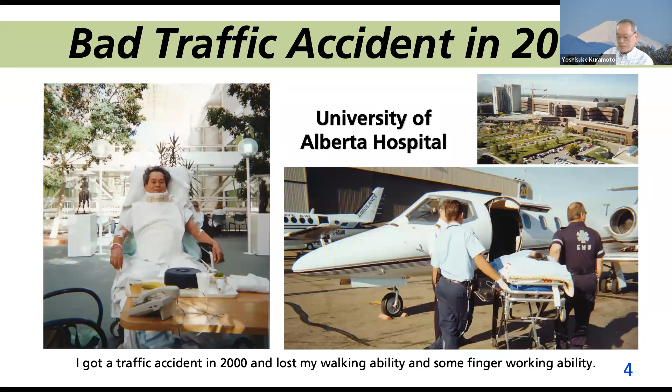In 2000, I got a serious traffic accident in Canada and lost my walking and some other abilities. In 2009, I came across a mobility scooter in Hawaii by chance. It was so good that I decided to buy one after I got back to Japan. However, mobility scooters were too expensive at that time in Japan and not offering the features I needed. But I got one using online auction made in Taiwan. That was what I wanted. But it was so heavy that I had to make a crane in order to self-load and unload with my Volvo wagon.

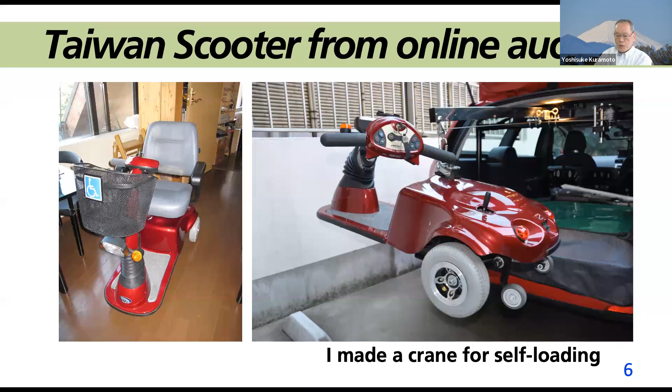In December 2013, I encountered a book titled FabLife, written by Hiro Tanaka, the father of FabLab in Japan. My longtime friend Izumi Aizu introduced that book to me. After I read it, I decided to dedicate the rest of my life to Fab. When I saw this photo of Fab City car at Fab 10 in Barcelona, though I couldn't go to Barcelona and didn't see it directly, I became confident that I could make a scooter myself by using plywood. No need for molding.

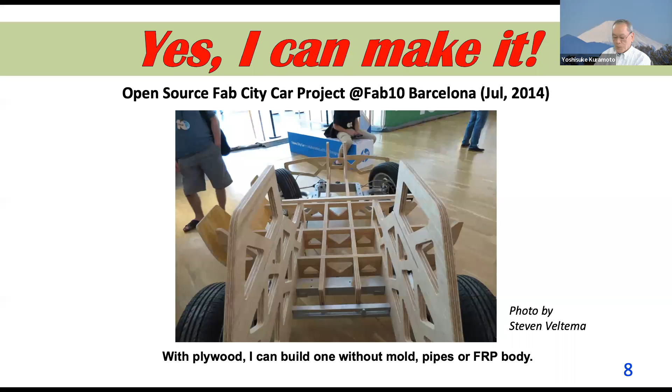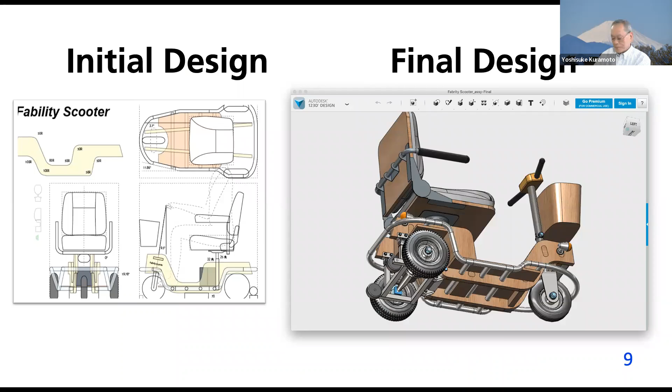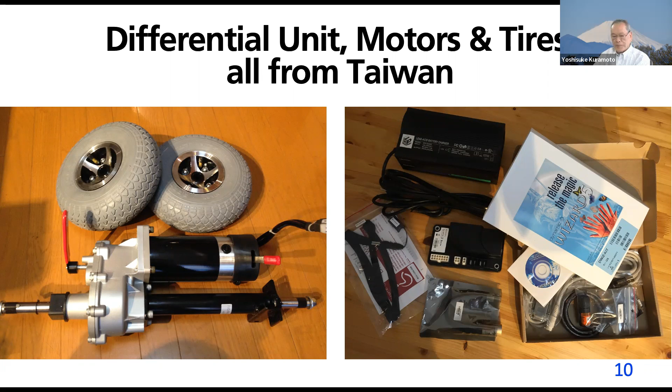After mastering the 3D software, I was able to finalize the scooter design. Those components were all sourced from Taiwan. Through Izumi's introduction, Mr. Ted Han of FabLab Taipei helped me identify Mr. Nick Su, who kindly shipped them all together to me. To save cost, I bought a second-hand scooter from online auction to obtain additional components such as seat and handle, etc.

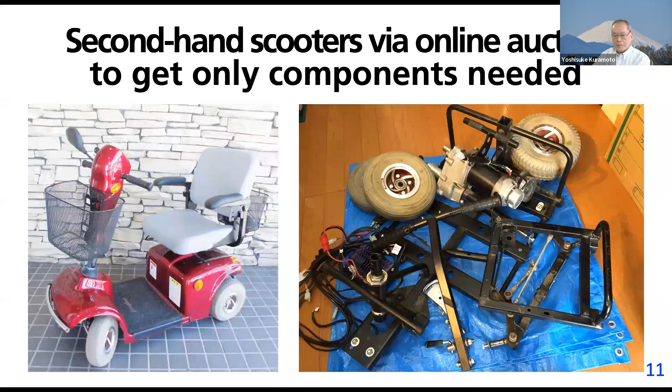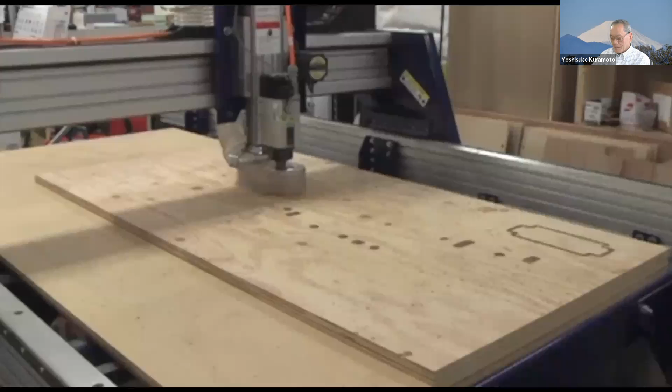I used plywood for construction material to make the body frame. To cut out the frames, I was able to use a ShopBot machine, thanks to Professor Tanaka at Super FabLab of Keio University. It took only 4 minutes to complete the whole cutting. Yes, very noisy.

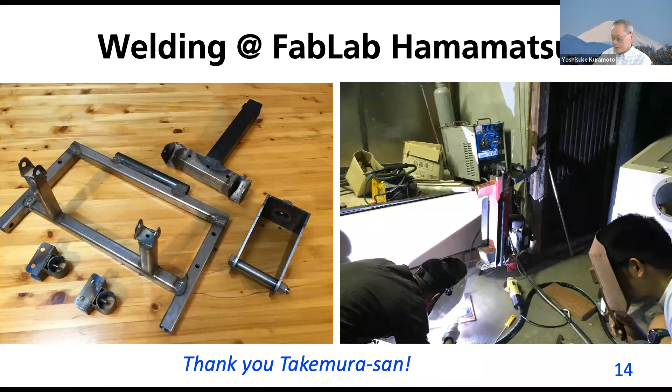I cut steel material manually myself to produce the rear axle mount and front forks. Welding was done at FabLab Hamamatsu, thanks to Mr. Takemura, my fab friend, who did the welding work there. All the parts were assembled at my small office. I used hacksaw and file the most, leaving my arms aching a lot.

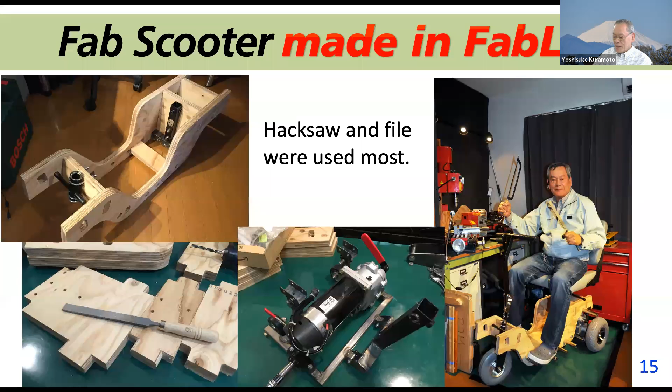In May 2015, just before I completed the first version, I went to Taipei to attend the second FabLab Asia Network Conference, Fan 2. I made a presentation of making my scooter and ended up meeting with the Prime Minister of Taiwan, Mr. Mao. A big surprise. Taiwan holds the majority share of the e-scooter market in the world.

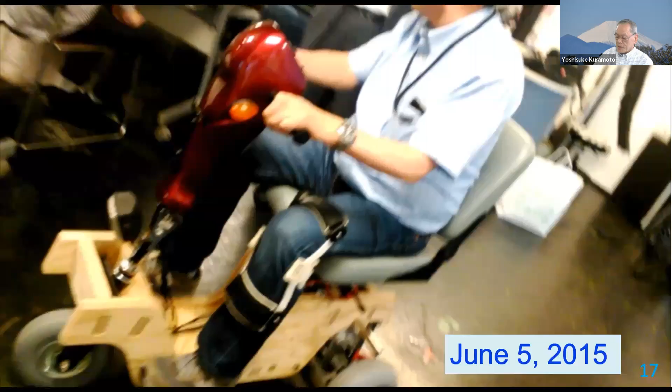Right after coming back from Taipei, I finalized the last steps and my Fab Scooter version 1 debuted on June 5th 2015 at FabLab Kannai in Yokohama. However, there are always bugs even after launch. After 2 days of test driving, I found 2 problems. First, the mounting handle was weak, so I replaced plywood with steel pipes. Second, I found the motor touching the body. I had to make the entire body again.

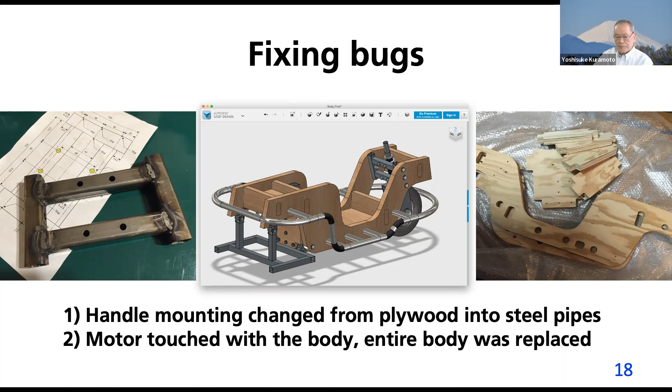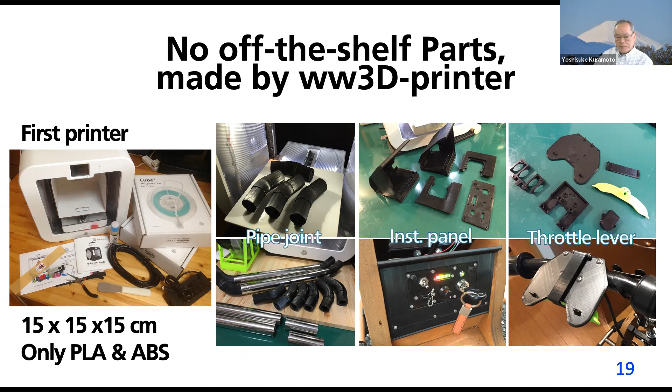Certain parts were not off the shelf at all: pipe joint, control box, throttle lever unit, and so on. No problem, I used a 3D printer to make them from zero. This is the first version of Fab Scooter, completed in October 2015. I took about 1 year from drawing to finish.

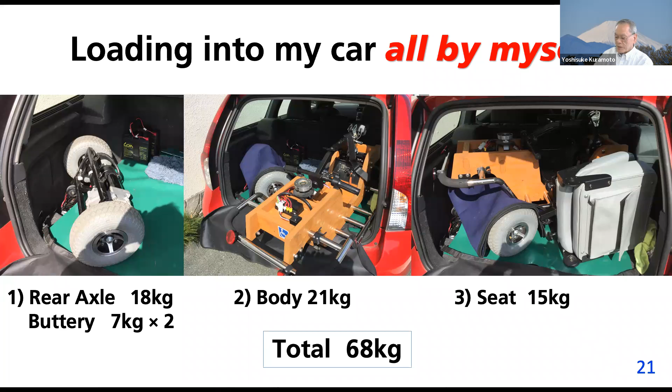Now I can load my scooter into my car all by myself. After unloading it, I have the freedom to move within a 5-kilometer radius, so long as the battery lasts. With my car and Fab Scooter, I can move to wherever I want. I am using my Fab Scooter almost every day. I strongly believe that mobility is a fundamental human right.

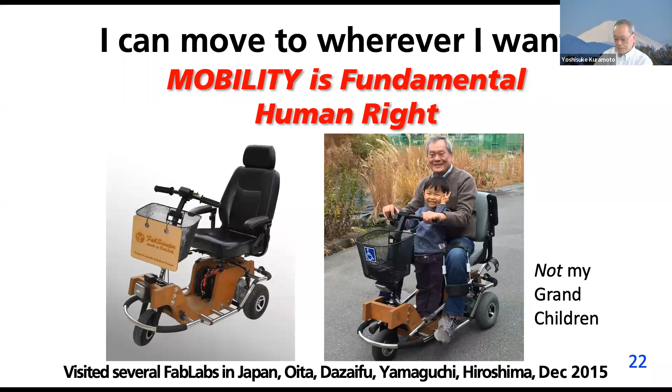In the first year alone, I traveled some 20,000 kilometers throughout Japan. Invited by Aizu-san, I visited the devastated areas hit by the 2011 Great East Japan earthquake and tsunami disasters and met the family members of the victims. It was 5 years after the disaster.

In August 2016, I tried to take an international flight with my Fab Scooter to participate in the 12th International FabLab Conference, Fab12 in Shenzhen, China. Do you know that electric wheelchairs must be accepted free of charge by all international airlines?

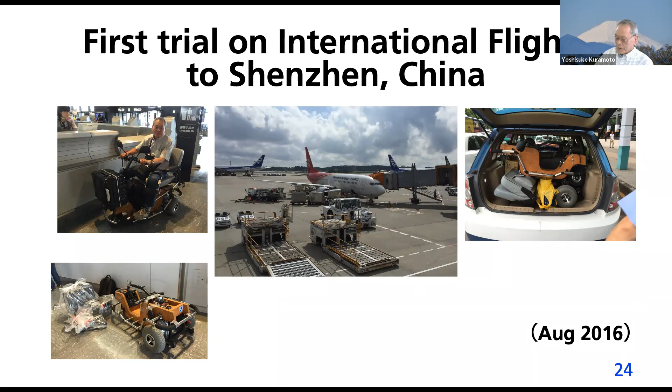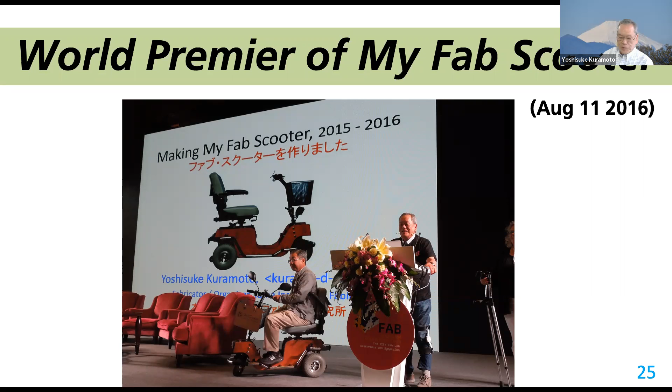In Shenzhen, I made my first English presentation in my life. After that, so many people came to congratulate and respect me. Unbelievable, I made it. Among them was Professor Neil Gershenfeld, the founding father of FabLab.

It seems many people like my story. I was selected as the finalist of the YouFab Global Creative Award in Tokyo in March 2017.

Three years after the Fab 12, I was invited to Maker Faire Dubai as one of the keynote speakers. It turned out that one lady who participated in my workshop in Shenzhen became the lead organizer of Maker Faire Dubai.

The keynote presentation in Dubai was such a dream experience, unforgettable. Thank you so much, Ms. Marwa Sarawi.

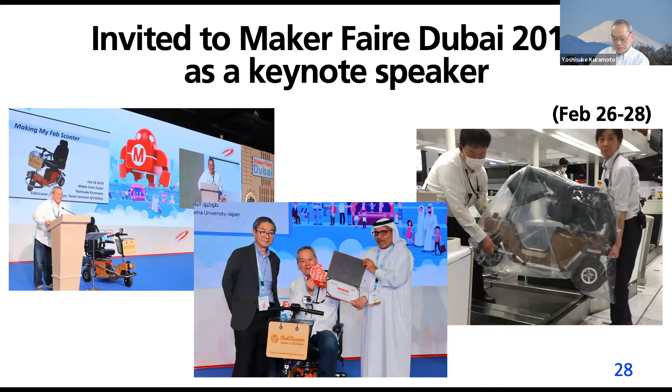But here comes the reality. The story doesn't end with the completion. After the launch, up to today, I have faced various troubles. I must take care of the maintenance work myself. Nobody else can do it.

For example, one day the electromagnetic cable was cut, so I did an emergency repair in my hotel room. The motor got weaker. After changing the motor controller and adding a heatsink, I found the battery cable connector contact was the real cause of the problem.

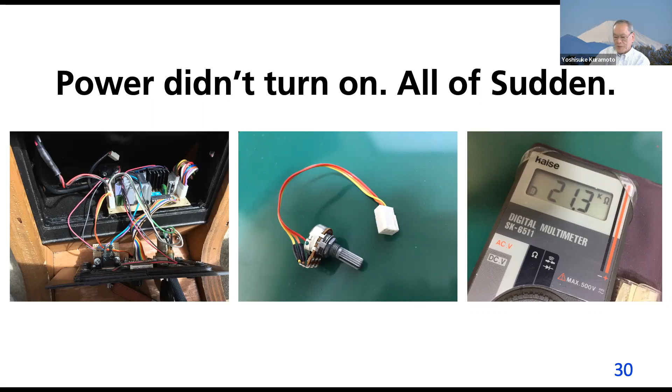One day, the power didn't turn on at all. The variable resistor went down. Of course, flat tires too. Many more troubles have happened since my scooter is my leg.

Any trouble should be fixed very quickly by myself. Otherwise I get stuck. I have a feeling electrical problems will occur again sometime soon. Trouble on the way out is the scariest thing. Be prepared always.

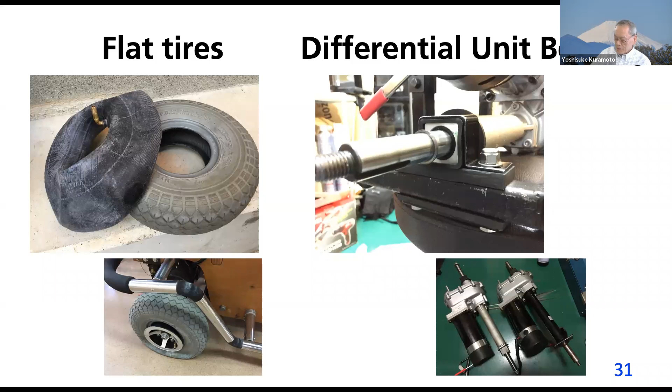Yes, the trouble did occur. Just five days after I finalized this draft, my Fab Scooter suddenly stopped working. The status lamp blinked five times, meaning a park brake fault. Looking at the manual, I found the park brake cable was cut, and I replaced the connector to fix it. Again, be prepared always.

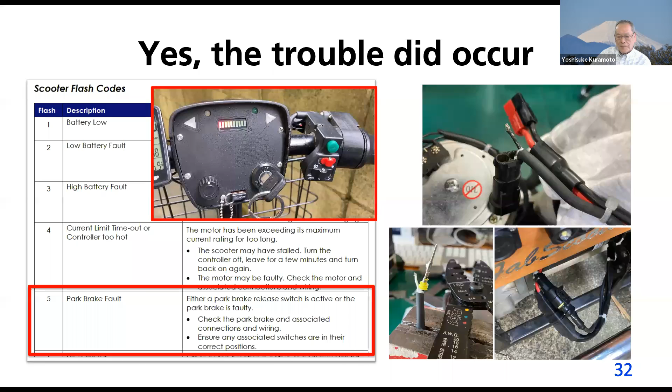Since I made this machine all by myself, I can take on any challenges I want. For example, I tried to print the tires using 3D printers. Well, the tire didn't work that well so far.

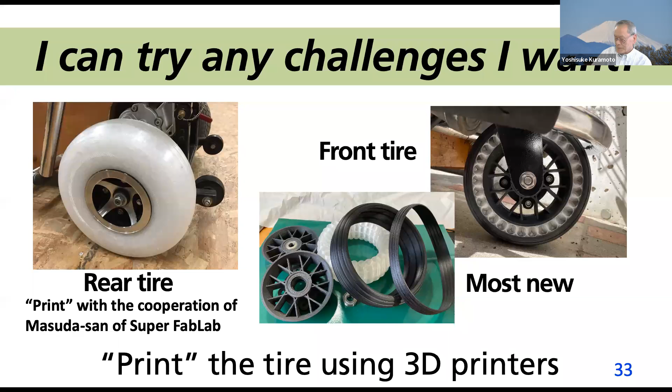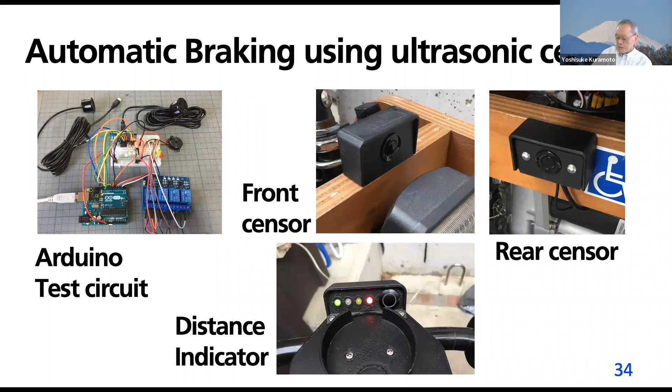Self-driving is the name of the game today, so I started making an automatic braking system using ultrasonic sensors. The speed is reduced to one-third if it detects an object one meter ahead, and it will stop at 50 centimeters distance. Very interesting.

Waterproof and protective coating for plywood usually lasts five years. It can be extended another five years if I repaint, but that means I lose my foot during the painting period. I decided to build a new body to minimize the idling time.

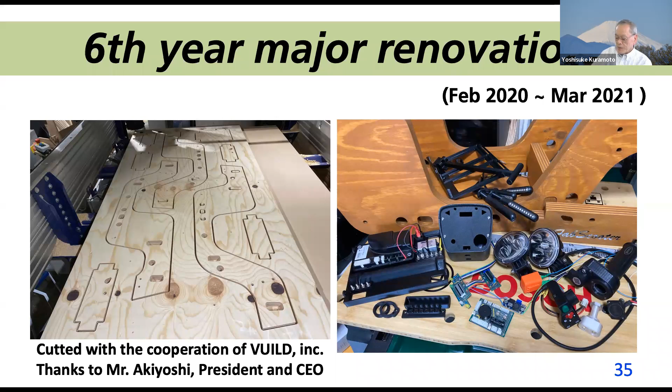All parts made by 3D printer, lighting, and wiring will also be renewed. The 3D printer I used six years ago had a small modeling volume capacity of only 15 cubic centimeters, and the filament was only PLA or ABS.

This time, I had a 3D printer with a larger modeling volume. I modified it so that all kinds of filaments can be used: polycarbonate PC, carbon fiber PC, thermoplastic polyurethane TPU, thermoplastic elastomer TPE, and nylon, etc.

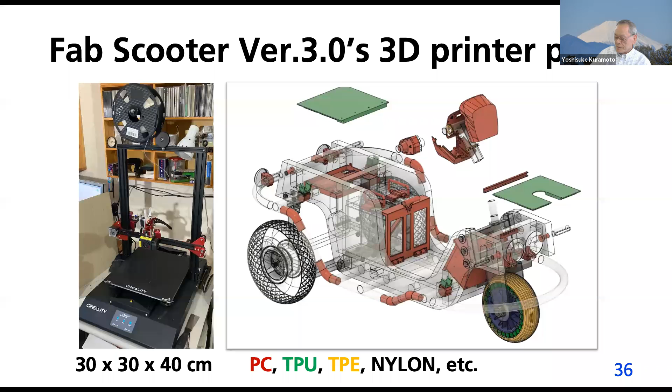Different materials were selected to fit different functions of the parts. Thus the weather resistance and durability have been greatly improved.

The number of parts made by 3D printer has increased significantly: throttle grip, gear mount, motor controller tray, instrument panel unit, dust cover, battery holder, etc.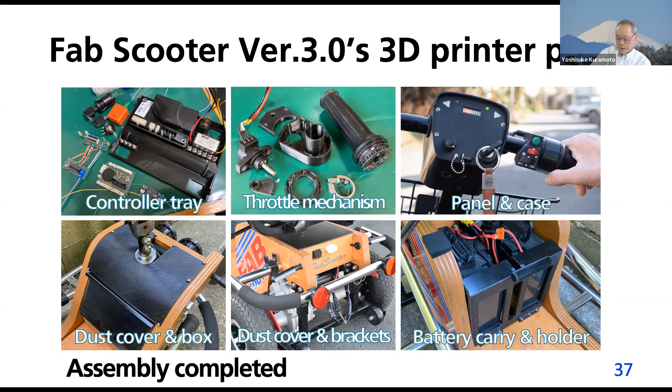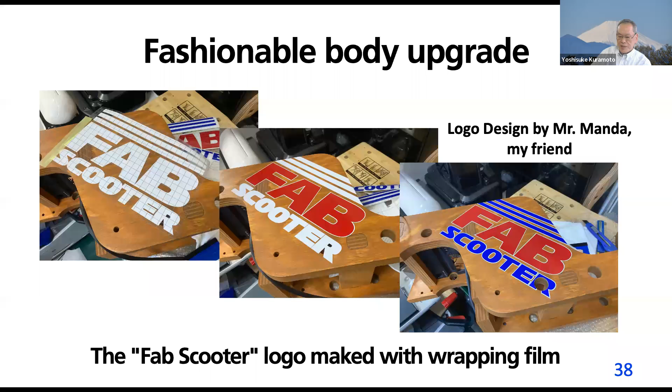The Fab Scooter version 2, I rode for 5 years. Now, reborn like a new car. Now it's version 3.

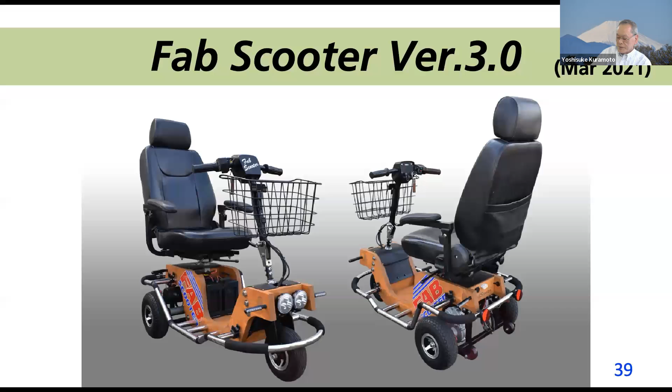Fab Scooter taught me the fun of making. Fab Scooter revived the joy of traveling. Fab Scooter has given me so many experiences I had never thought of before. Thanks to Fab Scooter, I have made many friends all over the world.

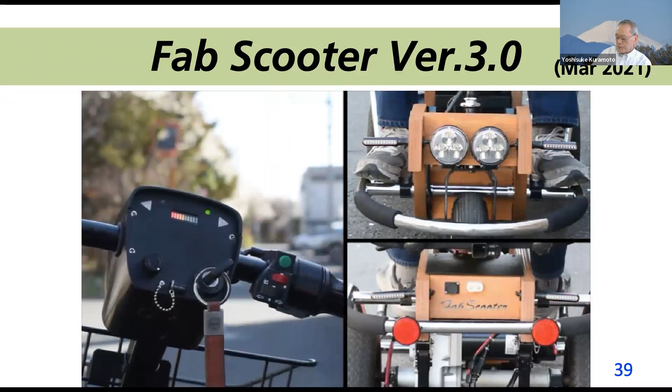In the coming 5 years or so, before I reach 80 years old, I would like to challenge version 4.

Finally, in Japan it is very difficult to diffuse such handmade vehicles due to huge legal barriers. Since 2017, I have personally supported attempts to build a Fab Scooter at the University of East Timor.

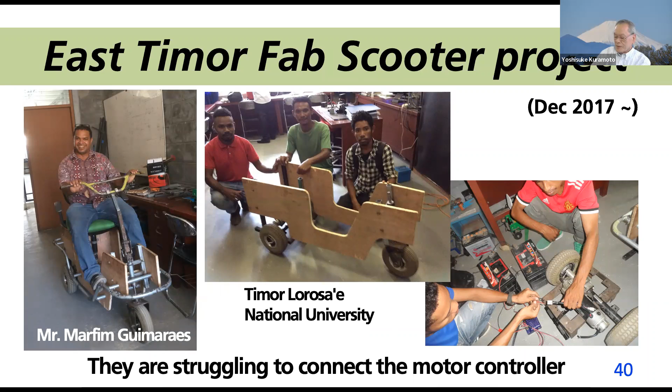Right now it is suspended due to COVID-19. I'd love to see Fab Scooter running in Bhutan as well. I can provide any data about Fab Scooter production and lend any support you guys want.

Finally, I would like to thank all the people who helped make my Fab Scooter and its subsequent activities. Special thanks to those people. I owe them a lot.

People who helped me making Fab Scooter include Professor Hiroya Tanaka, the founder of FabLab in Japan; Mr. Ted Han, one of the leaders of FabLab in Asia; and Professor Neil Gershenfeld, the founder and evangelist of FabLab globally.

Mr. Izumi Aizu, my professional friend for more than 40 years; Ms. Marwa Sarawi, the lead organizer of Maker Faire Dubai; and last but not least, Mr. Koji Yamada of the JICA project, who invited me to this great occasion.